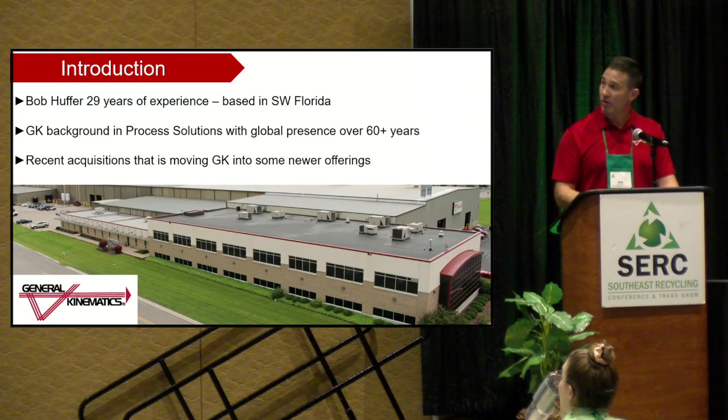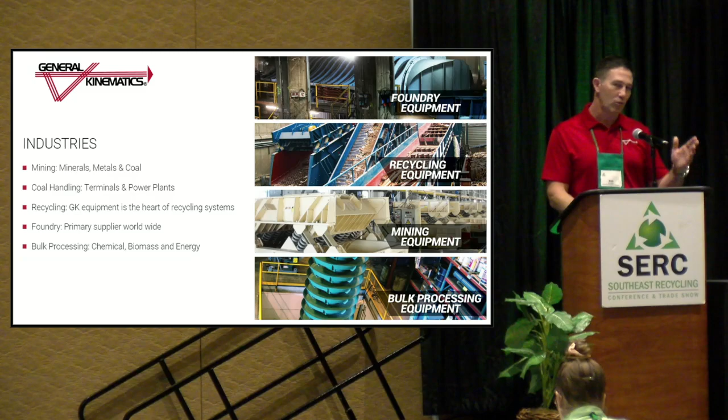So some of the industries we do focus in is not just recycling. It's actually probably in the 20-25% range of our business overall, but we do get involved in foundry equipment, some other mining, and other bulk processing. And I think the reason I bring this up, and I think it's important, is that we do a lot of work in a lot of areas, and some of the equipment offerings, some of the solutions that we provide for processing comes from other areas that you bring into new areas that you said, I would have never thought of using this over here, and a lot of times there's good value, good reason to do that.

So in the recycling area, we touch on a lot of different specific segments. C&D is probably one of our strongest, but not so much e-waste anymore, but some glass, some MSW. On the scrap metal side, we do quite a bit of work. Single stream, we're definitely, I'd say, still growing into - that's an area we're trying to build a bigger footprint for ourselves. Wood, biomass, and WTE is waste to energy - that's another major part of our business.

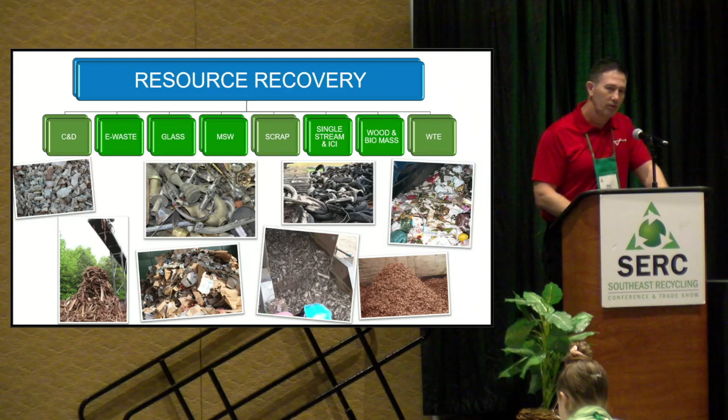So why are we here today? We'll start with the challenge. As Michael mentioned, as the presentation said, we're here to talk about pre-sizing and pre-sorting. Some of that involves a lot of rotating equipment, whether it's some type of drum, whether it's some type of trommel that you see down on the left-hand side, whether it's a series of rotating shafts, but all of those present some challenges with the material stream specific to single stream, a lot like C&D, a lot like MSW, a lot of waste streams where you can't control what's going to come in on your tip floor.

You're handling anything from boulders of concrete to strings of Christmas lights to plastic bags to garden hoses to all kinds of different things.

A lot of this talk in our conferences has been about how to better educate the public and how to better handle this at the curbside before it gets to the tip floor. I think those are great things to talk about, but I think the reality is that's not going to change. Dawn from Waste Management talked yesterday about some of the high contamination rates just in the state of Florida.

I live down here in Southwest Florida as well, and I can tell you that in my area there's roughly 30%, maybe even up to 40%, people who aren't permanent residents. So you have a ton of rental properties, people who either don't care or don't know your recycling mentality down here. So how are you going to control that from a reality standpoint?

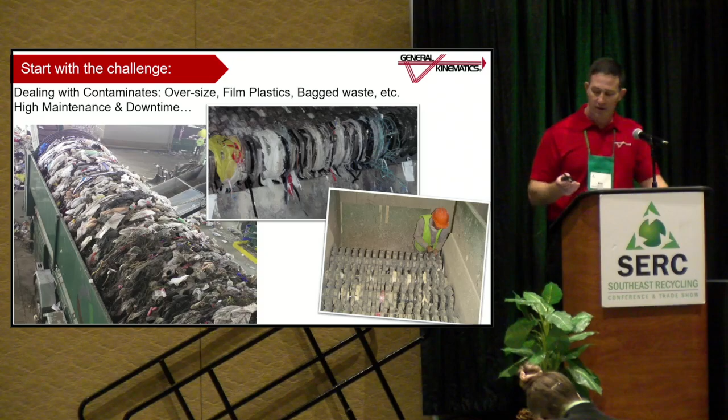So what I'm getting back to is the controlled, engineered method is where, in my opinion, you need to attack this, and that's going to be at each of the MRF's tip floors. So that's where we're coming up with the solution of the vibratory screen.

This is a newer development, within the last 5 or 6 years. We've had some development in the design of our vibratory screens to allow us to get a much higher action, a much longer throw or stroke of the machine.

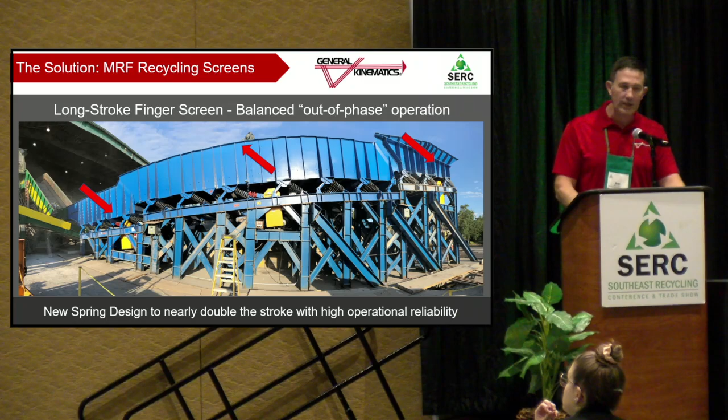So I got a little video here. Let's see if I can play it. Whoop, sorry. I think that'll play. Do I double click the green button? Okay, thank you.

We created a video here recently that goes into more detail about the vibrating screen. I'm not going to play the music, but it shows some of the components.

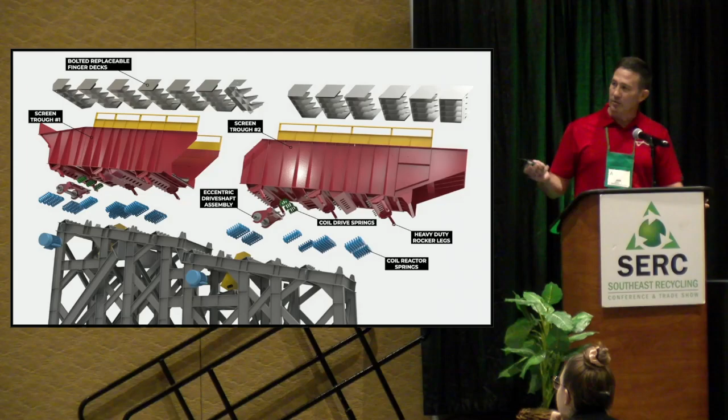There's two main bodies, the two red bodies here of the machine itself, and they run in opposition to one another. Because they are larger machines, they do have some dynamic force that goes into the structure, but because we run them in opposition with each other, they cancel and balance some of that dynamic force out.

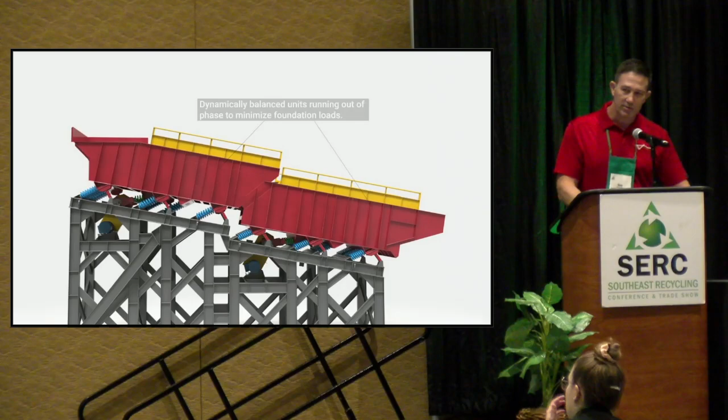That motion, that stroke with these newly designed springs really gives that longer throw, that longer action, that creates the separation of the material on the deck itself. Those are typically all steel finger decks, and those finger decks can be configured with different size configurations.

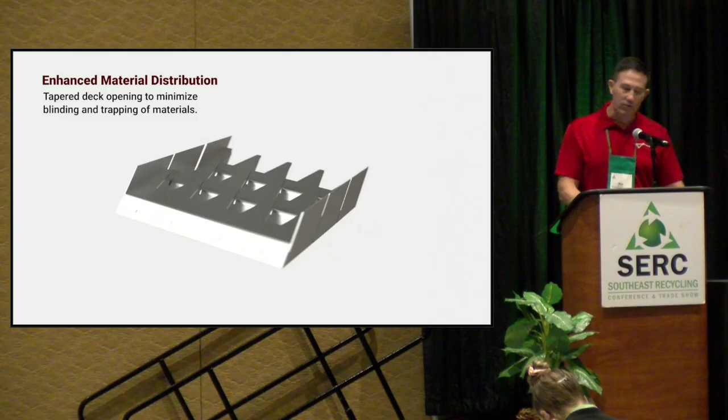We've used these in the scrap metal markets, in MSW, and in some single stream operations. Primarily, almost all C&D operations will have some form of a primary finger screen up front.

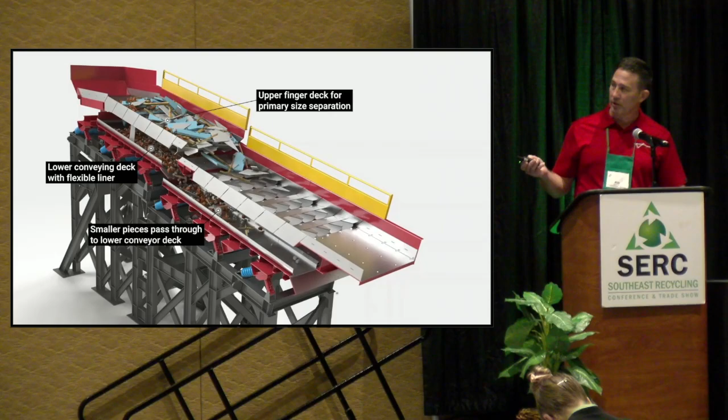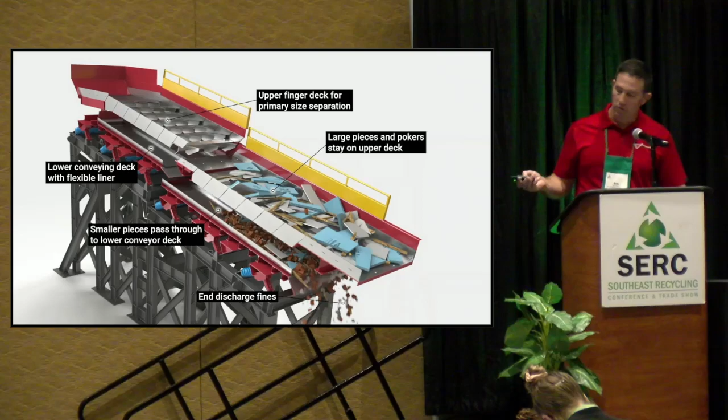This animation shows what's happening: on the upper deck, all your larger materials stay up while the finer materials drop through to a lower deck, and off the end of the machine you're creating your fines below, and your overs, your larger material, typically captured on two different belts going in two different directions.

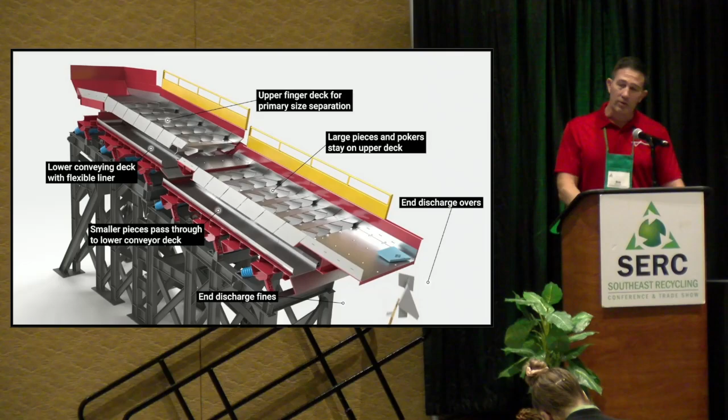So where we could see some value of this is anything big, bulky, bagged waste, stringy waste, some of the large film plastics—that could all be material that stays up on the upper deck, while the materials you're actually trying to sort and go after, like plastics, OCC and glass, would drop through to the lower deck, making that separation.

Now, I'm certainly not saying this is a smoking gun answer that's going to solve every problem, but I think it's maybe a piece that could add to an engineer-controlled method, something else that further helps the removal of those contaminants.

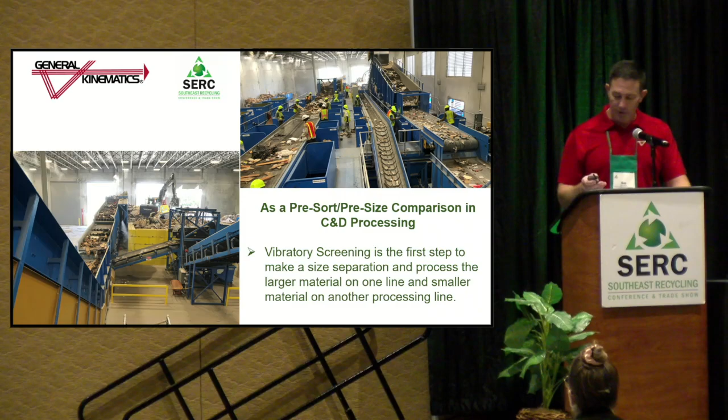This is just a quick picture of where in a typical operation, this again on the C&D side, we would have a tip floor, and we'd have that type of screen that's either direct loaded or could be apron fed loaded, either way. Just a picture of what that layout, what that system may look like as a complete configuration.

On the C&D side, again, we're not going too far out of the single stream side, but in the C&D side we do create this size separation, where the finer material goes over to what we call a B line or secondary line. It's a little more automated with just equipment, and then the larger, bulkier material goes over to more of a manual pick line.

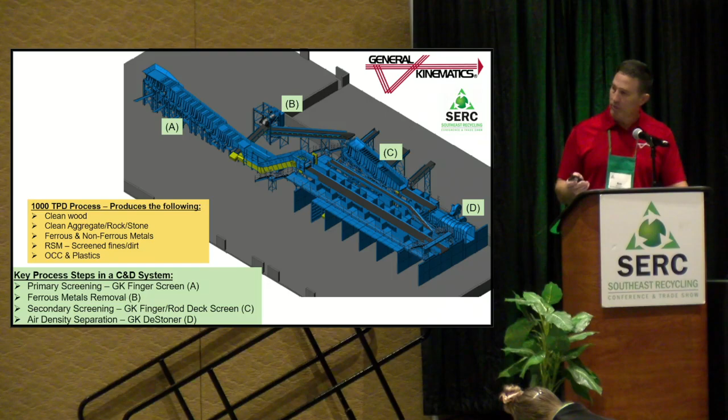Here's just a quick diagram of a C&D process we were actively working on, showing where that screen would fit in the process for pre-sort, pre-sizing. And that's it right here. These were a couple apron conveyors to gain elevation. That was where we were looking to install the finger screen up front for a project we were bidding on not too long ago.

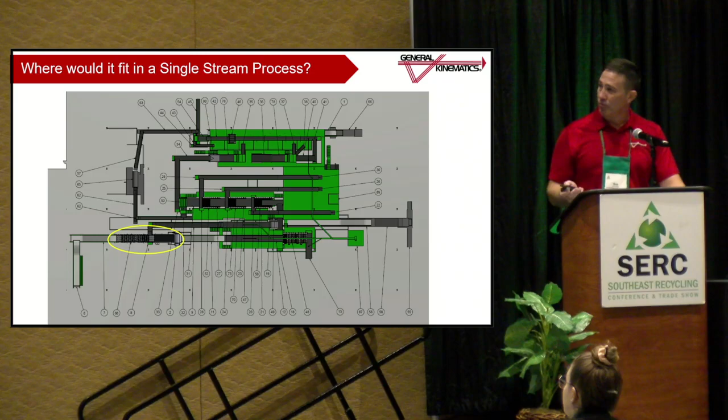But overall, the nice thing about these machines is that as material goes through, nothing comes into contact with any of the machinery. All the machinery is below the machine, meaning it's not like a ballistic separator or another type of machine where the material actually passes through, or shafts that are going to be in contact with some of the material itself. Everything is below the machine that creates that separation.

And because of that, that gives us very high reliability in terms of operation, and it also helps minimize any type of downtime.

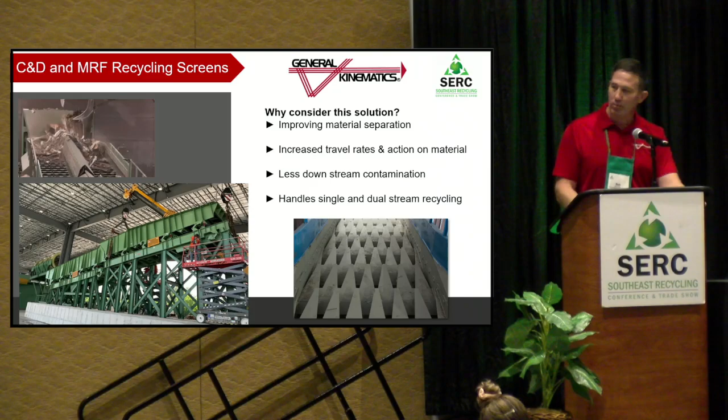We've got the guys right here from Marpan, one of our customers, and we were just talking yesterday about how they have one of our finger screens on their C&D operation. Didn't mean to put you on the spot, guys, but they just said they had a failure on the shaft, and it was roughly 13 years into the machine. So up to that point, they've had good reliability and good maintainability of the machine and equipment. That's great feedback to hear.

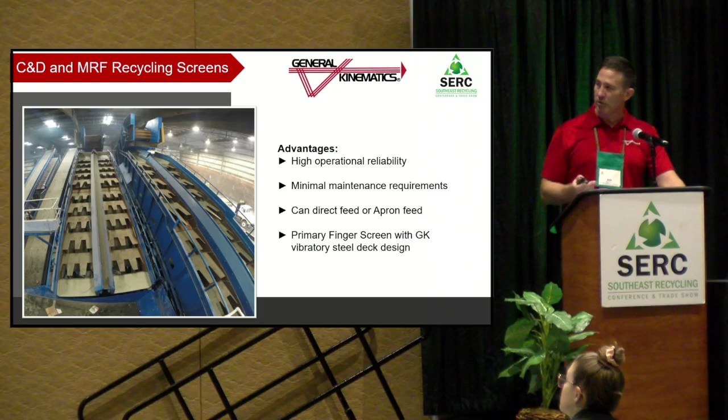Just trying to show some other examples of where these fit and how they work with some of the GK technology, and how we feel that technology could easily be implemented into some of the contaminant removal for single stream operations.